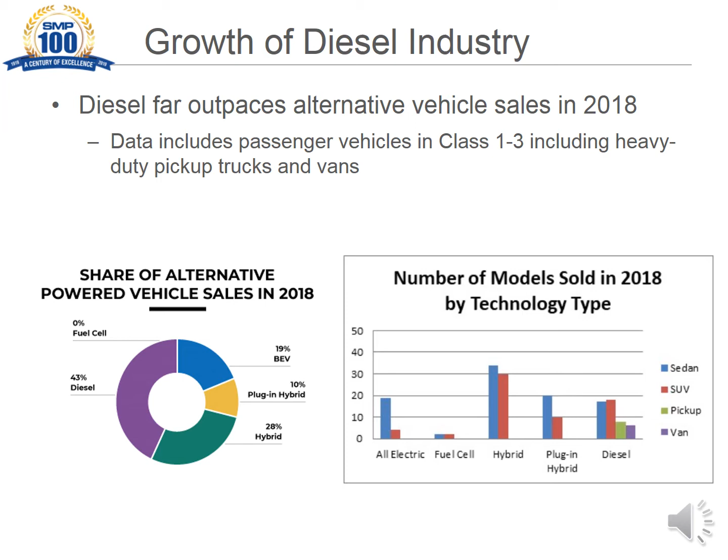The question comes up, why diesel? The motivation by manufacturers to go to diesel is driven by the corporate average fuel economy, or CAFE standards, set up by the federal government. The goal is to reach 54.5 miles per gallon by 2025. That may be extended somewhat, but at this point, 2025 is still the goal.

The question then becomes, how do we get there? The gasoline internal combustion engine appears to have reached its maximum efficiency, which falls short of the 54.5 miles per gallon as mandated. Diesel is a viable option to gasoline. It is 30 to 40% more efficient than gasoline, which results in lower fuel consumption when doing the same amount of work.

The new generation of diesel technology feels right at home in showrooms alongside advanced gasoline, battery electric, and plug-in hybrid vehicles. We know it's not a one-fuel-fits-all world, and for consumers, diesel is a proven performer that delivers real benefits: high fuel efficiency, great driving range, no sacrifices in vehicle size, fueling access, towing capabilities, or performance. This generation of diesel vehicle is among the most scrutinized, tested, and most improved in the world.

Looking forward, we expect diesel registrations to rise, especially in SUVs, trucks, and vans, in part due to full-year availability of the newest models. As seen with the 2018 and 2019 model years, manufacturers added more than 10 new diesel models to the U.S. market across the most popular vehicle segments.

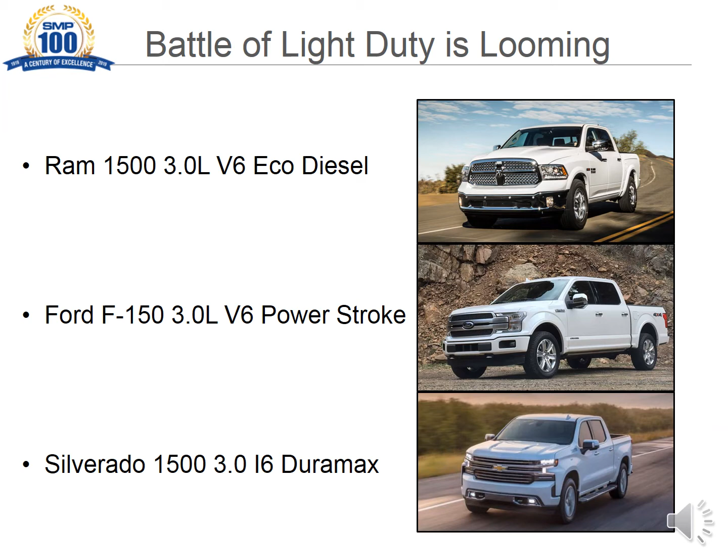The greatest signals of continued growth? New diesel options in full-size pickup trucks, among the most popular selling class of vehicle in America: the GMC Sierra, Silverado 1500, the Ford F-150, and Ram 1500. In the lineup of available alternative fuels, diesel remains the only one with choices in all vehicle segments: sedans, light trucks, SUVs, vans, and even luxury performance vehicles.

CAFE standards are not the only regulations that the OE must adhere to. The tailpipe emissions are under even more scrutiny. Now let's get a look at the components that the OE manufacturers rely on to meet the tailpipe emission standards.

You will need to familiarize yourself with new terminology when dealing with later model diesel applications, with names like diesel oxidation catalyst, diesel particulate filter, selective catalyst reduction, diesel exhaust fluid, and many new types of sensors that are used to monitor and control the function of these units.

Each performs a unique function and are placed in the exhaust flow in a specific order as laid out by the OE manufacturer. This specific order is similar to writing a formula where the ingredients must be added in a specific sequence. As each component performs its job, it is helping the process performed by the next component.

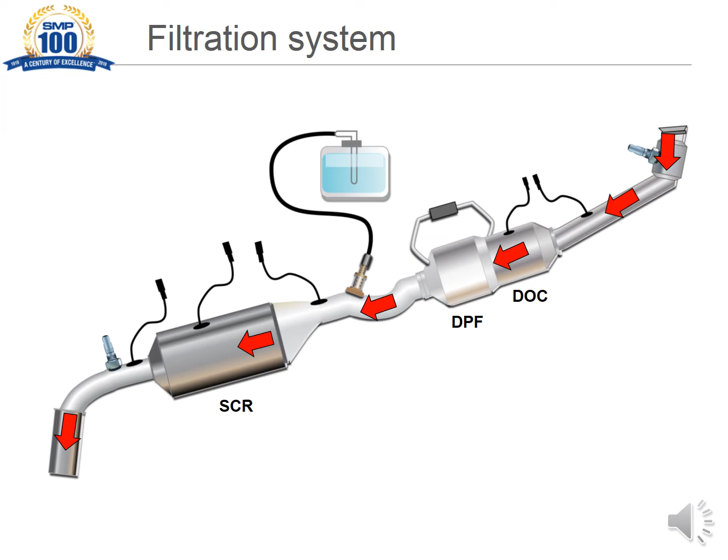The DOC, or diesel oxidation catalyst, is the first device in the aftertreatment system. It is a flow-through honeycomb ceramic filter that contains precious metals to start the oxidation of hydrocarbons, carbon monoxide, and unburned fuel and oil.

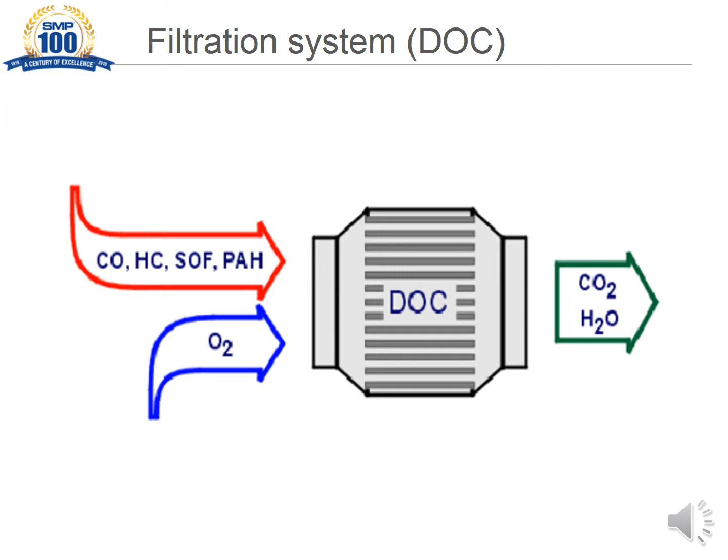The DOC converts the carbon monoxide and hydrocarbons into carbon dioxide and water vapor. This function optimizes the remaining gases that assist the remaining components to do their job better.

The DPF, or diesel particulate filter, operates by trapping soot particles from the engine exhaust, preventing them from exiting the tailpipe. The particulate filter is designed to trap and retain the solid particles until the amount of soot reaches a preset level.

At that time, the PCM recognizes the amount of restriction the soot is causing and commands the regeneration process. This process uses raw fuel to burn off the soot, where the DPF becomes a furnace.

Over time, the ash left over from the regeneration process can build up and cause flow issues inside the DPF, resulting in the need for replacement.

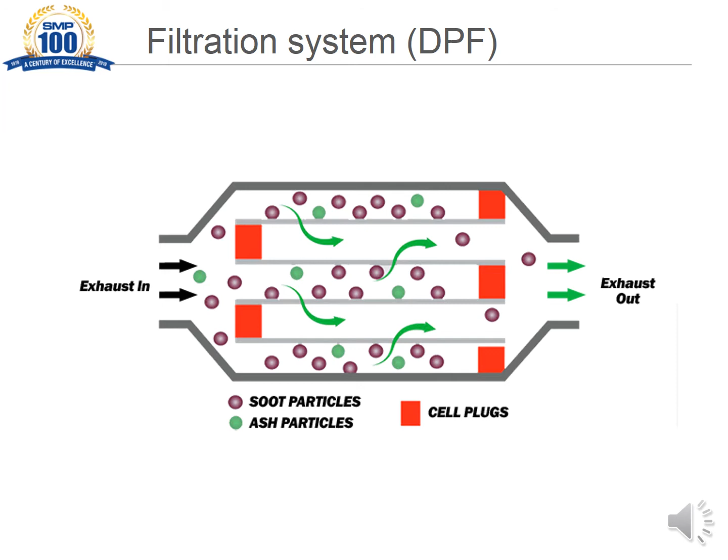The SCR, or Selective Catalyst Reduction Unit, is made up of precious metals and ceramic materials as a catalyst in the control of NOx. The actual function of the SCR requires a reductant.

The reductant used is an automotive-grade urea. The urea is introduced through a doser valve ahead of the SCR, where it is injected directly into the hot exhaust stream where it is vaporized.

Once vaporized, the ammonia in the urea attacks and breaks down the NOx into nitrogen, H2O, and a small amount of carbon dioxide.

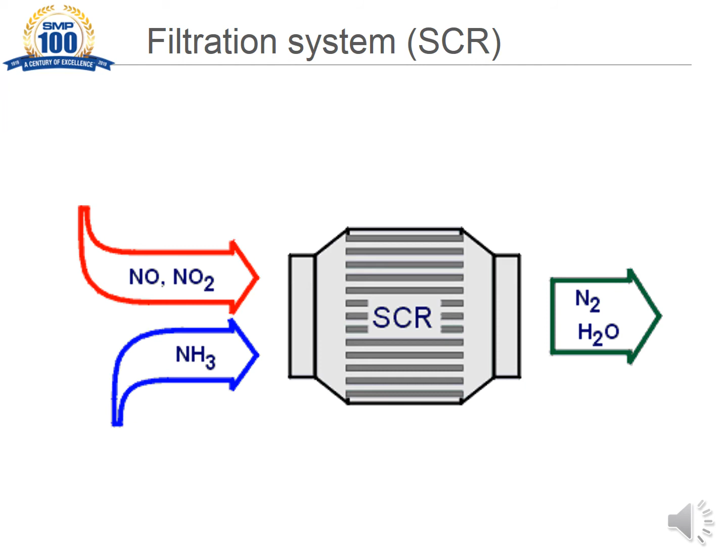First, the NOx-1 is located immediately after the turbocharger in the exhaust stream. This unit senses the amount of NOx and oxygen present in the raw exhaust. EGT1 measures exhaust temp in the raw exhaust stream.

EGT2 monitors the exhaust temp at the DOC. The differential pressure sensor measures the pressure difference between the inlet and outlet of the DPF and is monitored by the PCM.

DEF tank and doser valve: DEF is stored in the tank, which includes a heater and pump. Fluid is delivered to the doser valve, or DEF injector, and sprayed into the hot exhaust stream.

EGT3 monitors exhaust temp prior to the SCR. EGT4 monitors temp inside the SCR, and EGT5 monitors temp after the SCR. NOx-2 monitors the amount of NOx and oxygen being released out of the tailpipe.

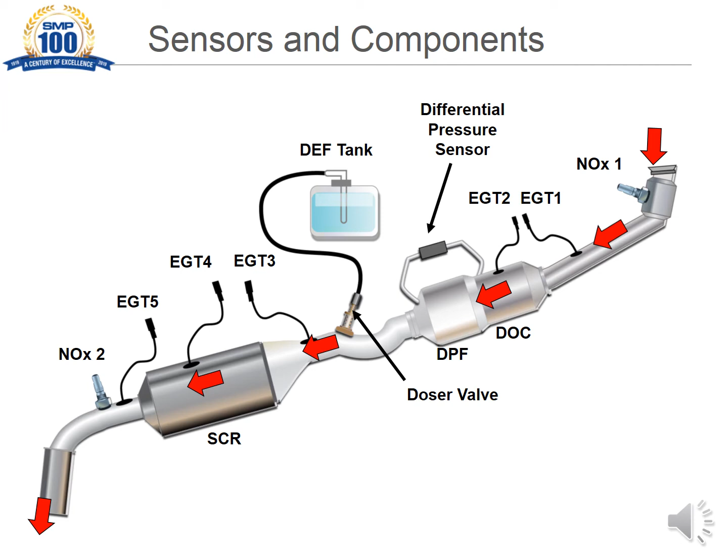NOx sensors are a complicated, high-tech component. Most applications use an upstream and a downstream unit. Others use only a downstream unit.

The module portion of the unit is usually sold as an integral part of the total unit, and others sell the module and the actual sensor separately, as on some Ford applications.

Diesel NOx sensors are dual purpose in that they are used to measure both the oxygen level in the exhaust as well as the NOx content. The measurements take place in two separate chambers in the sensor, and the exhaust gases flow sequentially through one and then into the other.

Gases flow from the exhaust stream through a diffusion barrier to reach the first chamber, which pumps the free oxygen out using a simple oxygen sensor. With the free oxygen removed, the NOx is then left to migrate through another diffusion barrier and into the second measurement chamber.

At this point, the NOx molecules encounter a catalytic element, which breaks them into nitrogen and oxygen gases. A second simple oxygen sensor is then used to pump the newly generated oxygen out of the chamber.

This electric current is used to calculate the NOx levels in the exhaust. The residual nitrogen gases then flow out of an exhaust port in the second measurement chamber.

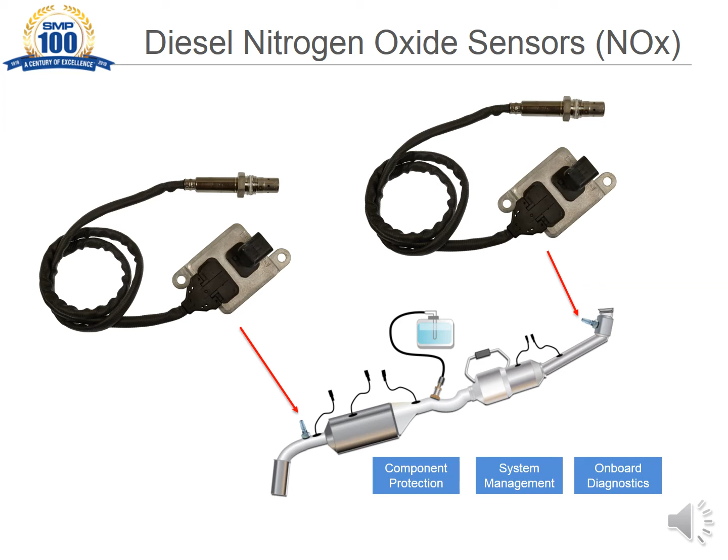NOx sensors were first found on the 2010 model year of GM pickups and vans, followed by Ford and Dodge in 2011. These units are critical to the amount of NOx being released out of the tailpipe. NOx is considered one of the most harmful emissions from fossil fuel-powered vehicles, resulting in their strict control. These units will become an everyday sale item in years to come.

They can fail due to exhaust components building up on them, hindering their functionality. Water intrusion is another big issue that can cause failure. This is more common on the downstream unit, which is very near the rear tire and wheel assembly.

When the vehicle is driven through a large puddle of water during the rainy season or during spring breakup in snowy areas, that water can easily splash onto the sensor. If the vehicle is in an area where roads are salted, the failure rate will most likely be higher. Damage to the cable can also occur from road debris or if the vehicle is driven off-highway.

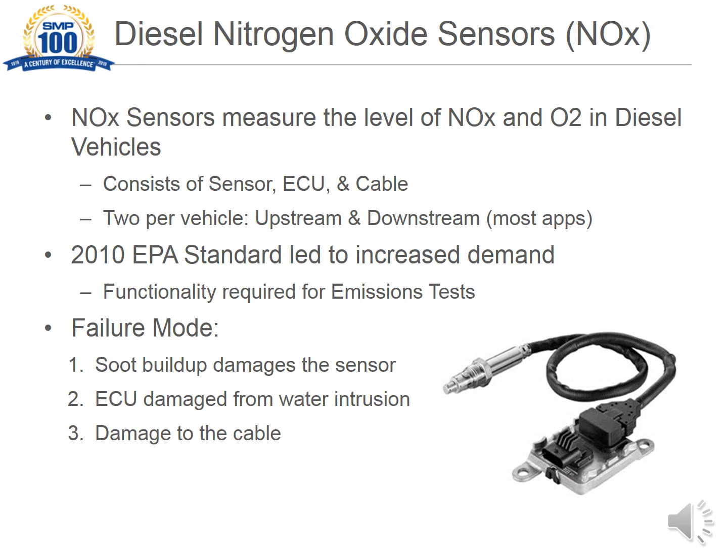EGT, or exhaust temp sensors, are not only an important input for control of the aftertreatment system, but are also used to protect the catalysts and filter from damage caused by overheating. The PCM constantly monitors each of these sensors to verify system functionality during normal driving as well as during the regeneration process.

With regeneration temperatures reaching 600 degrees Celsius, these units are exposed to extreme temperatures and raw exhaust that can and will cause them to fail over time. These components will become commonly replaced items.

Diesel aftertreatment system operation and onboard diagnostics require close monitoring of the temperatures across the catalyst and filter. In this Cummins example, each component has an EGT sensor at the inlet and outlet. With these sensors, the onboard system can determine the temperature rise or fall across each component.

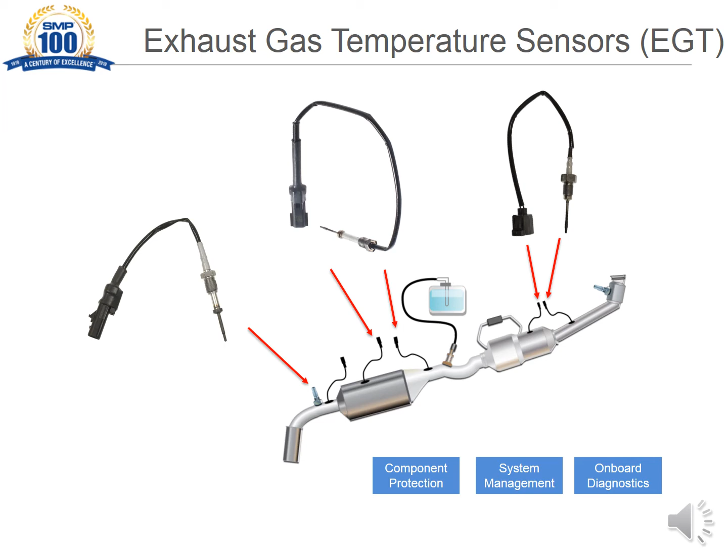The diesel particulate filter sensor uses low-power radio frequencies, or RF signals, to transmit and receive RF signal through the filter. Soot and ash accumulation levels, as well as filter failure symptoms, can be directly measured by the change in response of the RF signal.

If the pressure differential exceeds a specific threshold, the PCM recognizes that the buildup in the DPF has reached a critical amount requiring a regeneration to occur. This is when the PCM will initiate an active regeneration process.

Each manufacturer has their own way of determining the pressure drop or restriction across the DPF. For example, Duramax samples the pressure before and after the DPF using two metal pressure taps and hoses that connect them to a DPS. Mounted away from the heat of the exhaust system, the DPS reports the pressure difference to the ECM.

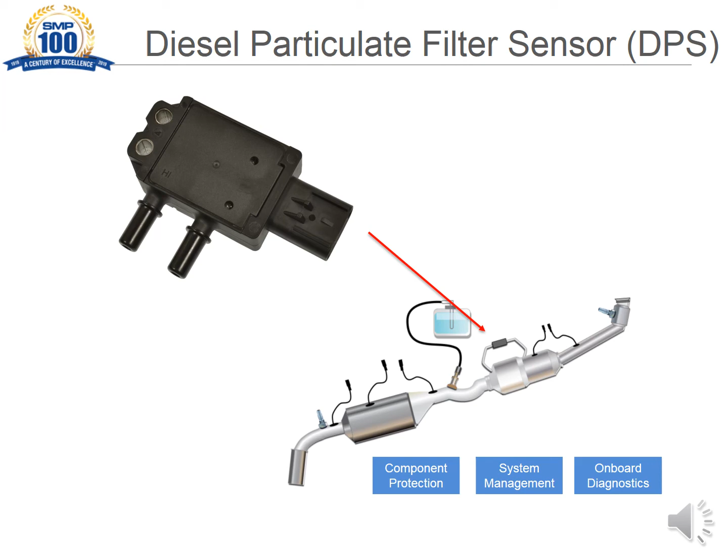Diesel exhaust fluid, or DEF, is a non-hazardous solution which is 32.5% urea and 67.5% deionized water. DEF is sprayed into the hot exhaust stream of diesel vehicles to break down dangerous NOx emissions into harmless nitrogen and water. The ammonia component of the urea vaporizes in the hot exhaust.

This vaporized ammonia breaks down the NOx molecule into nitrogen and H2O, both harmless and useful gases individually. DEF is not a fuel additive and should never come into contact with diesel fuel.

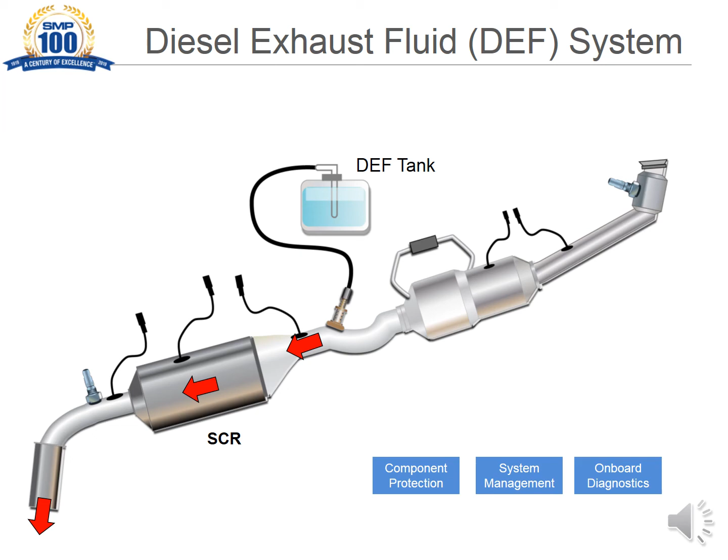The DEF pump is just that, a device that channels DEF fluid from the DEF tank to the DEF injector, where it is dosed into the exhaust during the aftertreatment process.

DEF can be corrosive to most metals, so the pumps are primarily made up of plastics, which do not wear as well as metal, decreasing their lifespan. In addition, the electrical connectors are prone to corrosion buildup, causing the unit to malfunction.

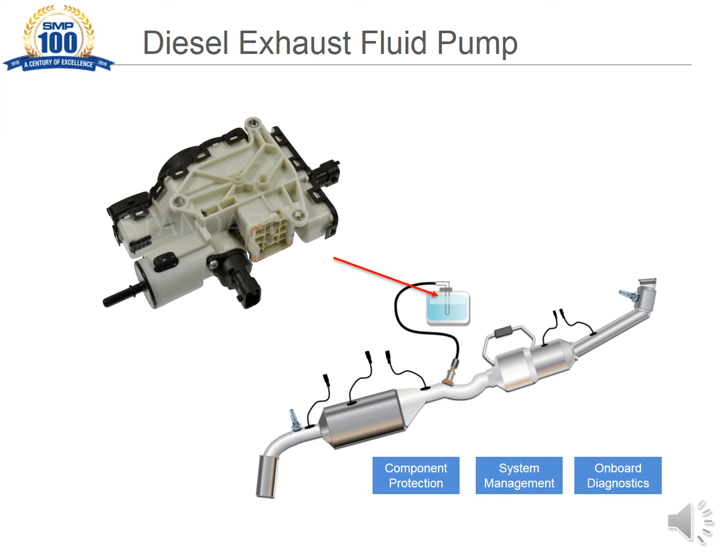Next, commonly called the DEF heater, this unit is located in the DEF, or diesel exhaust fluid, tank and actually contains the pickup tube for the reductant pump module, an electrical heating element, a temperature sensor, as well as an electrode type level sensor.

Ford terms the whole unit the reductant heater and sender assembly. Both the GM and Ford versions are very similar in appearance. However, the Dodge unit cannot be serviced with individual components like the Ford and GM units can. The Dodge unit is sold and serviced as a complete modular unit.

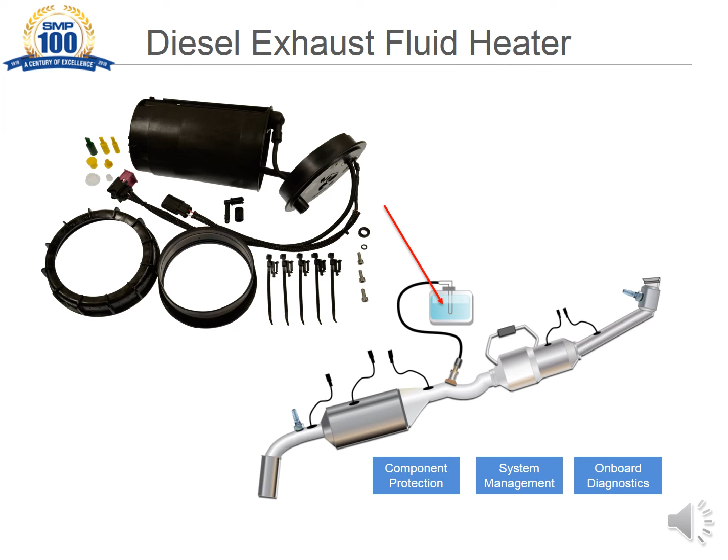The DEF injector is used to inject small quantities of diesel exhaust fluid into the exhaust, where it vaporizes and decomposes to form ammonia and carbon dioxide. This is where the ammonia attacks and breaks down the NOx gases to nitrogen and H2O.

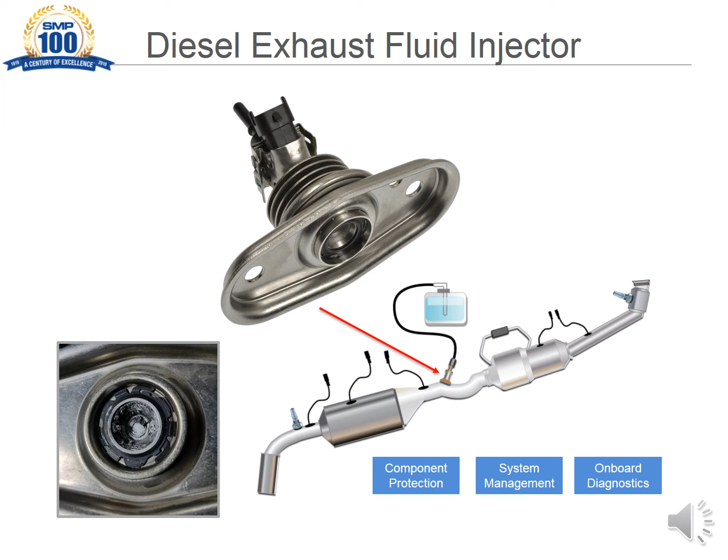DEF is available under a multitude of brand names. It is important to follow the instructions written by the manufacturers in regards to properly storing product when it is stocked in quantities. Putting it in the window display in hot temperatures is not recommended, nor is allowing it to freeze. Sticking with a proven brand is also recommended. Any subpar product may contain impurities that can adversely affect the way it works.

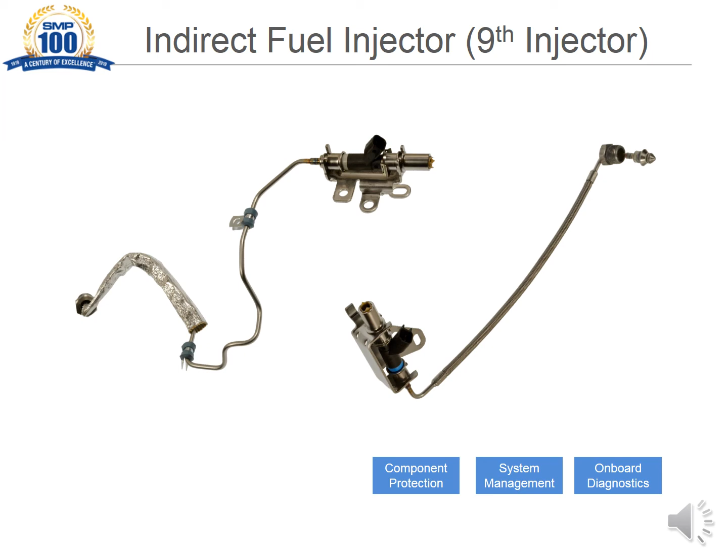In 2011, GM came out with a new idea to enrich the exhaust to assist the aftertreatment system. The 6.6-liter LML incorporated a ninth fuel injector located in front of the diesel oxidation catalyst in the turbo downpipe. It receives its fuel from the high-pressure fuel injection pump at the front of the lifter valley and injects diesel directly into the exhaust stream during active regeneration.

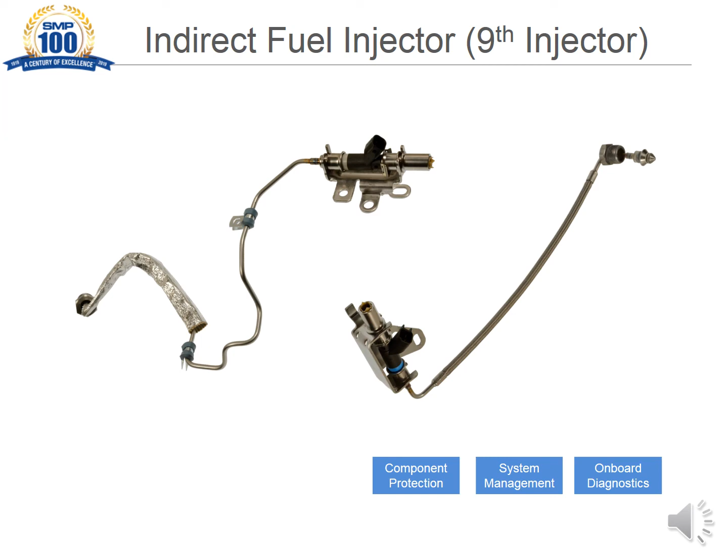There are two part numbers available for this component. One covers 2011 to 2016, and the other 2017 and later. This indirect system is unique to the GM Duramax, while the other manufacturers use a post-injection process where raw fuel is injected during the exhaust stroke, allowing raw fuel to enter the exhaust stream.

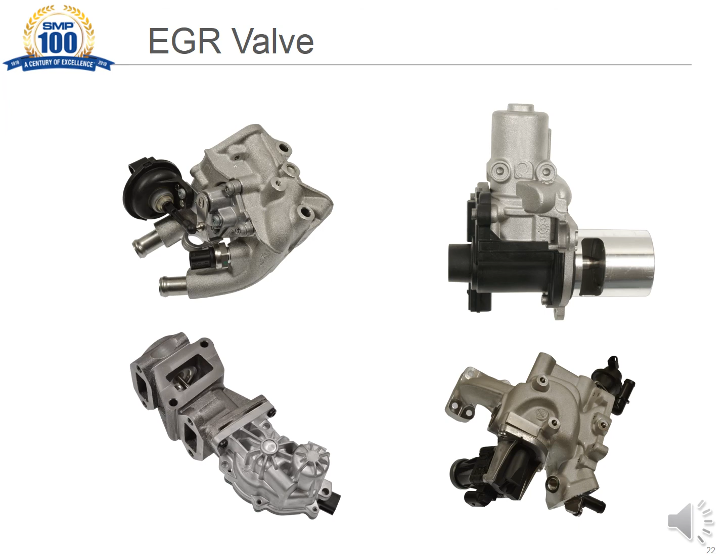The function of the EGR valve is to recirculate small amounts of exhaust back into the combustion chambers of the engine in order to decrease the combustion temperature, thereby reducing the formation of smog-producing nitrogen oxides. EGR valves can malfunction by becoming stuck open or closed due to carbon buildup.

The EGR system is vital to the emission system when it comes to the reduction of NOx gas. This gas is formed in the combustion chamber due to compression and high heat, both of which are prevalent in a diesel engine. By reinserting exhaust gases into the combustion chamber, the gases can cool the combustion chamber, and because the exhaust gases are oxygen starved, it has little effect on the actual combustion process.

The flow of exhaust gases back into the combustion chamber must be carefully metered to achieve the desired goal. Therefore, the PCM controls flow of EGR.

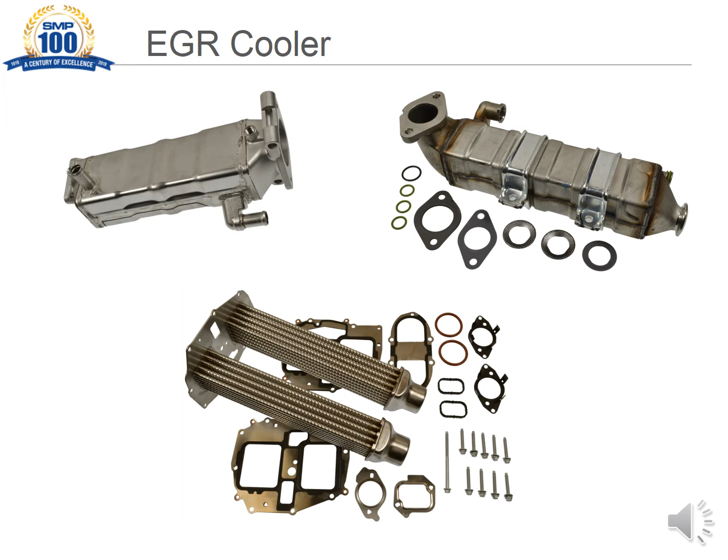The EGR cooler is a component used to lower the temperature of the exhaust gases that are recirculated by the EGR system. The EGR system recirculates exhaust gases back into the engine in order to decrease the cylinder temperatures and NOx emissions. EGR coolers can malfunction by becoming clogged or closed due to carbon buildup or poor maintenance.

Part of the maintenance is to maintain the engine coolant. Engine coolant is the medium used to cool the hot exhaust gases before being introduced back into the engine. If an engine cooling system is not properly maintained, the EGR cooler can become damaged, causing exhaust gas to enter the cooling system, or coolant can enter the EGR system. Neither scenario is good.

We hope you now have a better understanding of the potential business that is available when dealing with diesel customers. It's not only about injectors, pumps, and turbos. There is a tremendous opportunity to be your customer's source for their diesel emission needs.

We also hope that you now have a better understanding of what is involved in the diesel emission systems, from DOCs to DEF and everything in between. The potential for sales of aftertreatment components is just beginning and has a huge growth potential. These are items that are easy to stock, easy to sell, and have a high demand.

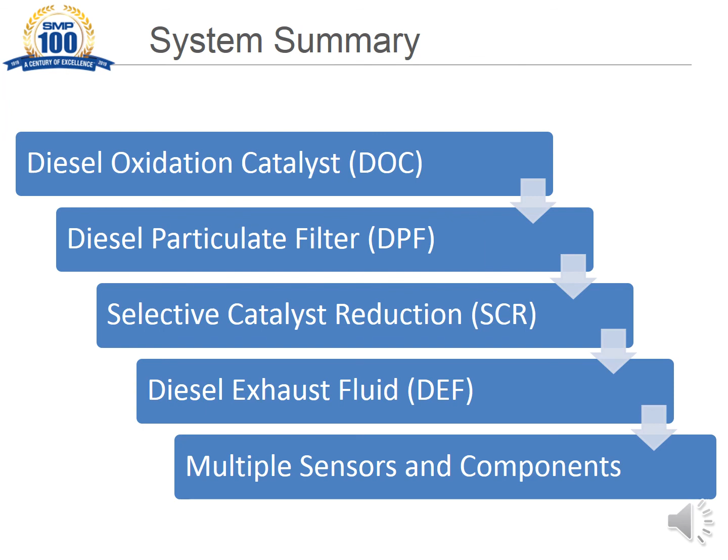Diesel-powered vehicles are going to be around for years to come, and we may very well see even more diversity in the types of vehicles that offer diesel engines as an option. That being said, we will be here to supply you with the parts that your customer needs and the educational information that you need to meet your customer's needs.